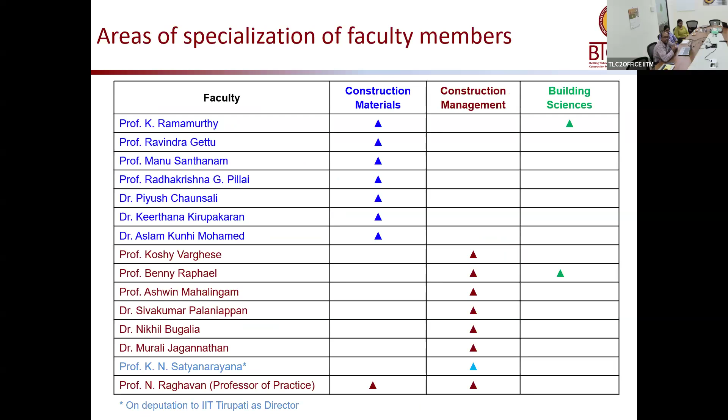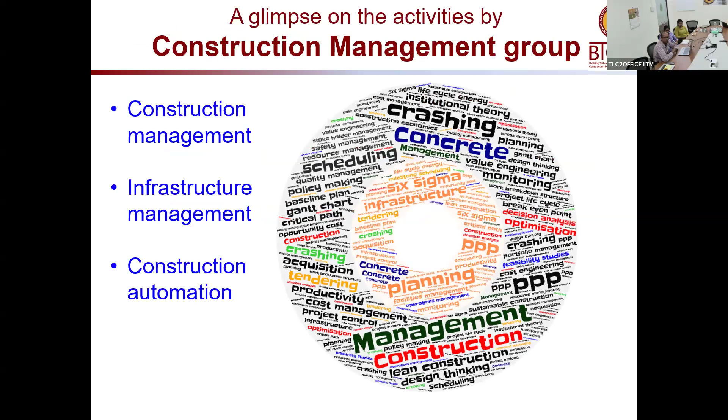Within the construction management group, of which I am a part, we focus on 3 important things: one is the regular construction management aspects, then the broader infrastructure management, and then we work on construction automation.

When it comes to studies on construction management, the typical questions we ask are related to some of the burning problems of the industry, like cost overruns, time overruns, and low productivity. These are traditional problems with respect to the construction industry, and there are solutions, but it's often not so easy to apply these solutions on field because it comes with its own problems in terms of application and implementation.

That's where we try to see how do we make lean construction, how do we implement lean construction into construction projects, wherein we try to identify the wastes not only in terms of material waste, but also in terms of process waste. We try to see what are those wastes that reduce our productivity at site, reduce them, and if possible even eliminate them. We work jointly with some of the leading construction companies in order to implement lean, and we have seen a good amount of improvement in productivity wherever we have been involved and lean construction has been implemented.

The next is a very crucial aspect: how do we embrace digitalization in the industry. We have a lot of discussions on building information modeling, and a lot of discussions on artificial intelligence that is coming up. But to what extent are these being taken to the industry, and to what extent is research progressing in these areas such that ultimately they are of help to us when it comes to actual implementation of projects?

Our faculty are working on solving some of the burning problems of the industry when it comes to application of BIM, artificial intelligence and digitalization, or even drones, and how they can help us solve some of these problems. Now, when it comes to project execution and project delivery, the whole framework is important to support the environment in the project and implement certain practices and take them forward.

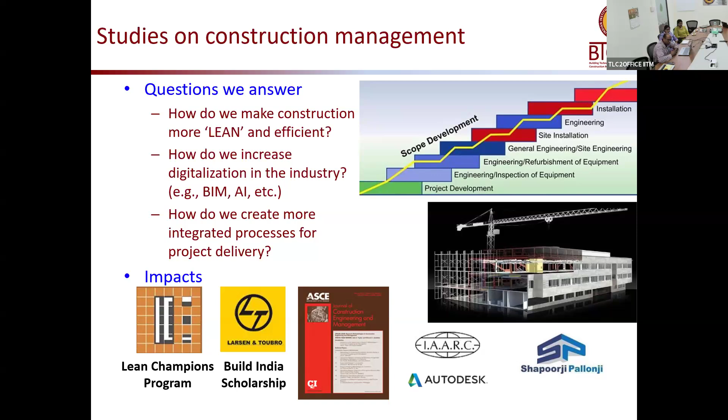Many of our research outputs have been published in some of the top-notch journals, and we have labs dedicated to building information modeling, through which we try to solve some real-life construction problems and take it straight to the industry.

Going ahead, in terms of studies on infrastructure management, mega projects are a norm these days. There's no project that's of a small value these days, and the scale at which we are talking about projects is phenomenal, and we are no less compared to what happens in other countries. So when it comes to management of mega projects, it comes with its own problems. It's not so easy. So what is required to get these mega projects to a successful conclusion?

That is something we work on, especially when the current trends are towards implementing sustainable practices, which is something we can no longer avoid. It is no longer a buzzword, it is something that's definitely required. We have centers here like Technologies for Low Carbon and Lean Construction, TLC2, wherein we all work together towards bringing in sustainable practices. The construction management group is also actively involved in getting these practices implemented into project sites.

When we have projects, it's also important to see whether we can get them delivered at a faster pace, at a lesser cost, and with improved quality. So what should we do for that? That is also something that we keep working on.

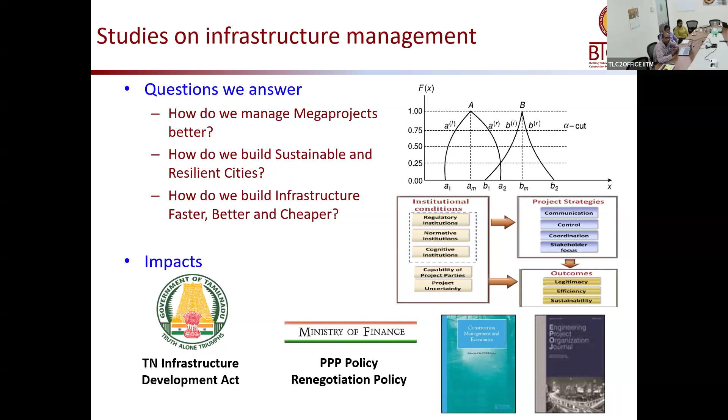We have active collaborations with the government of Tamil Nadu, and collaborations with the central government in bringing some of these practices. Some of our works have been published in some of the best journals, and we take up our presentations at some of the best conferences in the whole world.

When it comes to construction automation, which is fast catching up these days, we look at automation from the angle of improving time, cost, and quality of construction through automation and robotics. So we have students and faculty working on vision-based technologies, text-based technologies, a number of AI-based solutions, and bringing in automation combined with artificial intelligence to see if we can do something better than what we are doing, to improve productivity at the project sites.

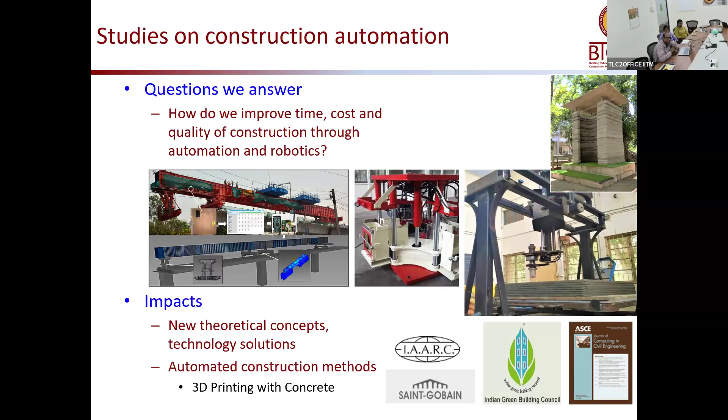We have an entire setup for 3D printing, and we have faculty fully dedicated to the workings of 3D printing. We also have students in our labs working on developing mix designs for 3D printing, and looking at some of the problems associated with 3D printing and how technology can be used to solve these problems.

In studies on sustainable construction, some of the pertinent questions we answer are: what about the relative contribution of construction energy with respect to building life cycle energy? How do we integrate sustainability metrics into construction planning and control practices? Because unless something is measured, we don't know whether we are improving or achieving what we wanted. So how do we integrate these metrics into planning and control practices, and how do we improve the schedule performance of construction projects in India with practical applications, to see if we can really make a difference in delivering projects better, faster, and with much improved quality?

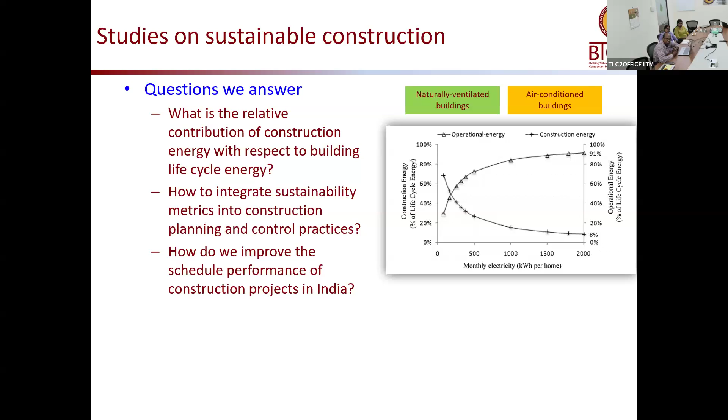Some of the recent works we do in our labs include digitized quantification. When it comes to concrete and construction and demolition waste, one of the biggest problems is how do I measure, how do I segregate, and how do I measure the quantum of waste? Because that is the beginning of everything else.

So our students along with our faculty members are working on ways in which you can have digitized quantification of C&D waste with minimal manual intervention, so that it can be faster and more efficient. You can also see the robotic arm doing segregation of different types of waste in the heap. That's very important for waste recycling industries, and segregation is actually a problem, but there are solutions, so we are working on them.

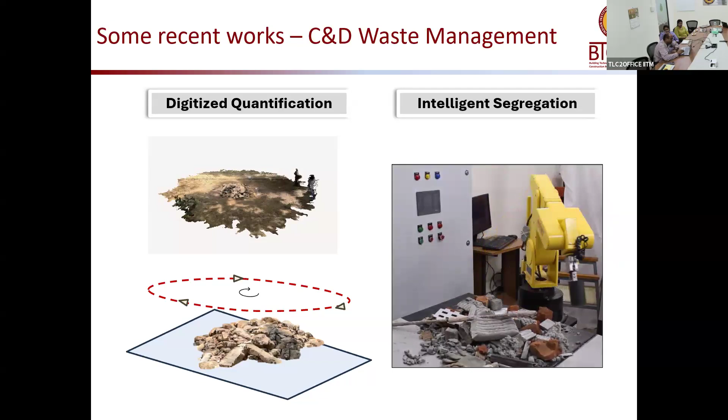So we have our own VR lab, where there is virtual reality training that some students and researchers undergo, looking at how we improve the quality of construction through VR-based training. You might have heard about safety-based VR training, but we are looking at quality-based VR training, and we have developed modules for that, which is really quite interesting.

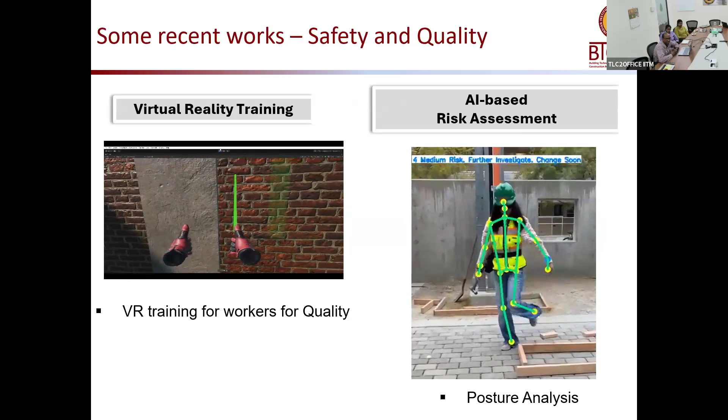And if you happen to come this side, we'll be very happy if you can walk down to our lab and we can show you what we are doing here. Interestingly, we are also working on AI-based risk assessment for safety assessment.

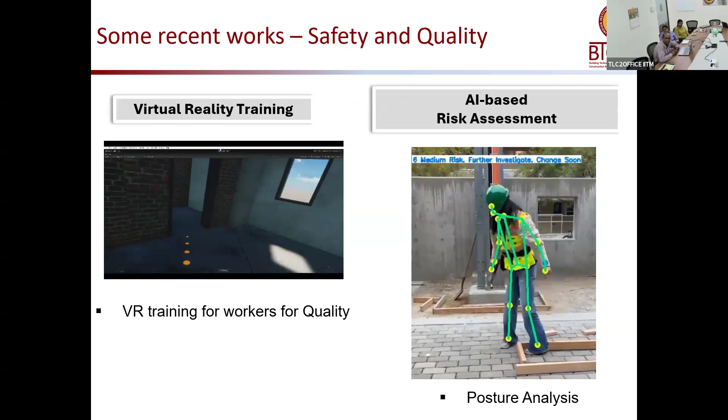You can look at the short video there on posture analysis to see if things are going on the way they should. These are some exciting things that we are working on, where we try to predict the failure of the 3D printing process with the help of vision-based techniques, for AI-based risk assessment.

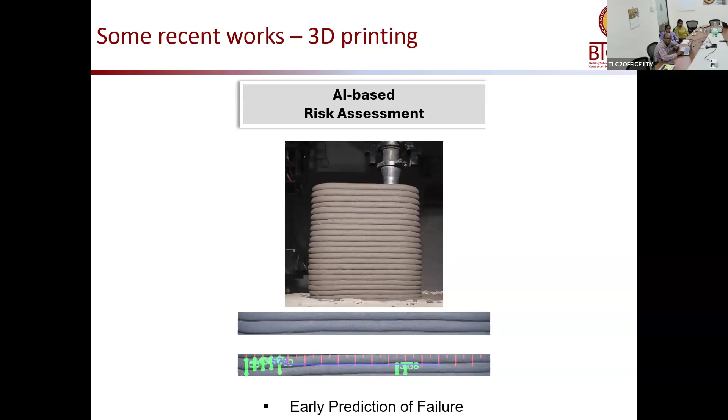We can predict based on how these layers are changing their shape. You can look at the video and see whether this particular mix is going to meet the requirements or not. This is something that one of the PhD students is working on, which is on early prediction of failure.

Now, I work on this area of construction, AI-based construction contract risk assessment, wherein I try to see if there is some kind of risk in the given document that we are going to sign as a contract document, and see if that can be assessed well in advance through natural language processing based techniques.

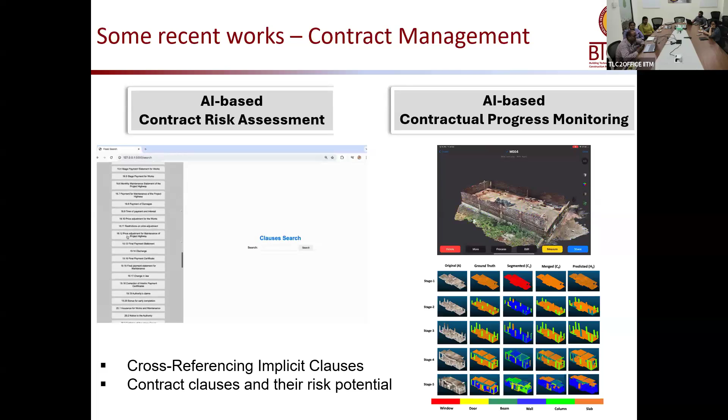We also have some of our faculty working on AI-based contractual progress monitoring, because this is one of the key areas in construction where monitoring the progress instantly is really important, since only then can we take corrective action. If progress monitoring and reporting has a lot of gap, that doesn't help in improving what I'm doing. So we can have monitoring systems which immediately compare with baseline schedules and come up with possible areas that might need immediate attention by stakeholders involved in the project.

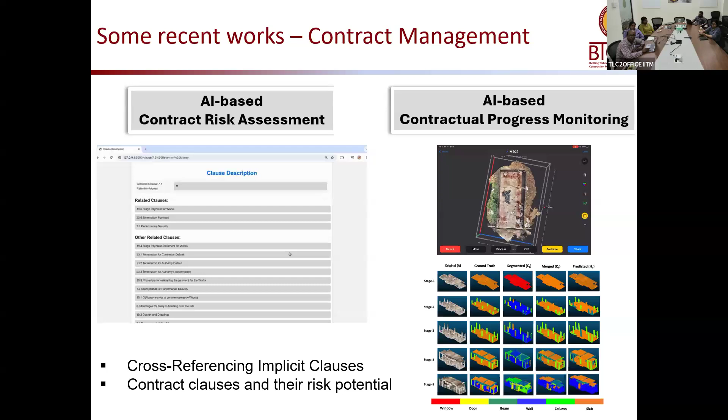So now I request my colleague Dr. Kirtana to take us through some of the research areas in construction materials.

Thank you, Hari. So hi everyone, I'm Kirtana here. I'm going to give you an overview of what we do as part of the materials, construction materials group. Some of the areas we are working on are cement chemistry and concrete microstructure, because we are involved.

The whole idea is to come up with a sustainable cement construction material. One key aspect is to work with cement, which we know has high carbon dioxide emission. So we try to work at the cement chemistry level and its microstructure and tailor it in such a way that it has low carbon output.

Then there are mechanical properties, dimensional stability, corrosion and durability. Corrosion is one of the pressing issues here, as we have a lot of existing structures corroding much before their design life. So how do we assess the corrosion and how do we design structures for long-term performance and durability? That's one of the areas.

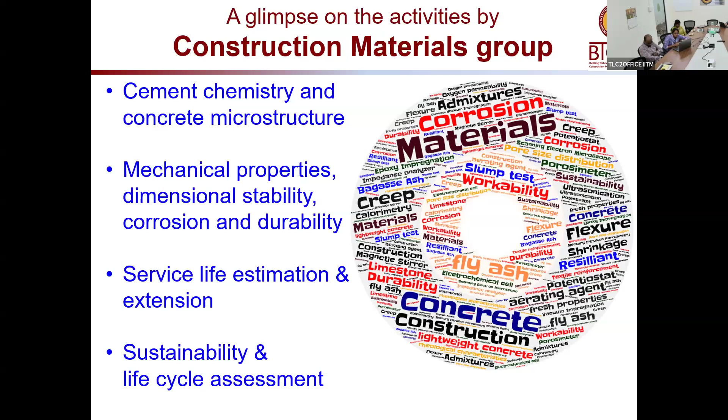Then there's service life estimation, which is how do we quantify a particular mix or material, and how do we estimate its service life and extend it? The other thing is sustainability and life cycle assessment. I'll go through these in more detail.

The main questions we're trying to answer are how to design special concrete for various specific needs. We are focusing on self-compacting concrete, fiber reinforced concrete, textile reinforced concrete, lightweight concrete, and so on. We look at how to tailor the mixes for these special concretes, how to assess their mechanical and durability performance, and how to utilize various byproducts and alternative materials.

We all know that alternative cementitious materials or supplementary cementitious materials are being used in cement, like fly ash, slag, limestone, and so on. So how do we effectively utilize it? What are the strategic procedures in which we have to go about using these materials?

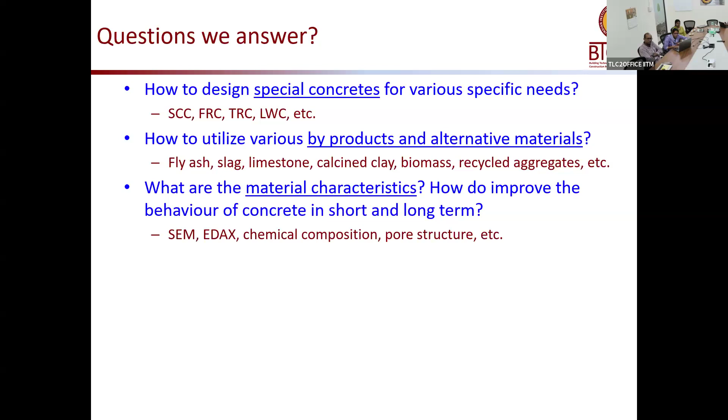Another thing is material characterization. When we are developing new materials, we have to understand its microstructure so that we can evaluate its short-term and long-term performance effectively. So we do SEM analysis, that is scanning electron microscope. We try to understand its chemical composition, the pore structure, and so on. We look at the micro scale.

We also look into estimating and enhancing corrosion resistance and the service life of our concrete structures. How do we arrest corrosion? In this study, we look at how to calculate chloride ingress, carbonation, corrosion rate, and how we protect the structures against corrosion using different protective methods.

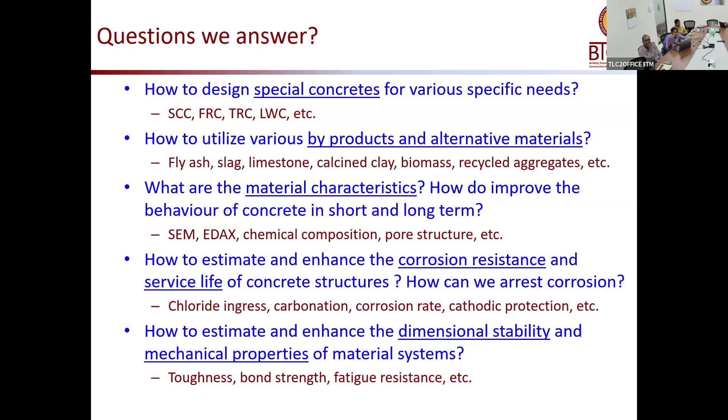The other thing is how do we estimate and enhance the dimensional stability and mechanical properties? We are developing so many tailored mixes and materials. After it hardens, we have to evaluate its mechanical performance so that we can use it in structural components. So there is importance in how we evaluate its toughness, bond strength, fatigue resistance, and so on. These are some of the broad questions we are trying to answer.

We have state of the art laboratory facilities in our department. This is the mechanical performance of civil engineering materials laboratory. We have servo hydraulic machines starting from 5 kilonewton to 1000 kilonewton. We do a lot of fatigue, fracture, and bond strength studies here.

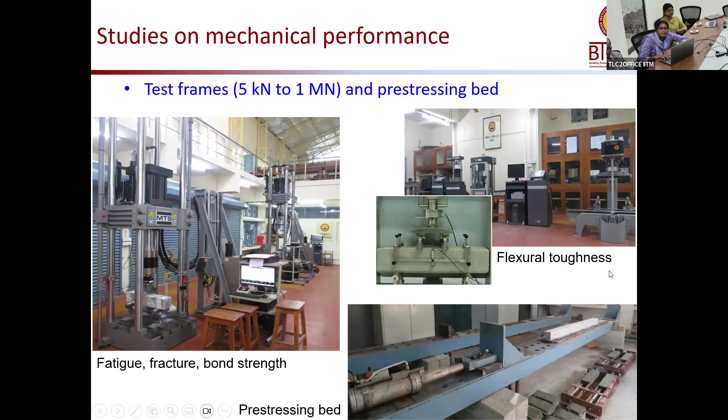We also do studies on pre-stressing beds where we do post-tension bars under stress conditions and under corrosion activities. So this is mainly for understanding the mechanical performance of the materials.

And then we have the lab for studying long-term durability performance. We can give the conditions of different temperature, carbonation, and set humidities at different levels, and we can see how the materials respond to these different environmental conditions and evaluate its performance.

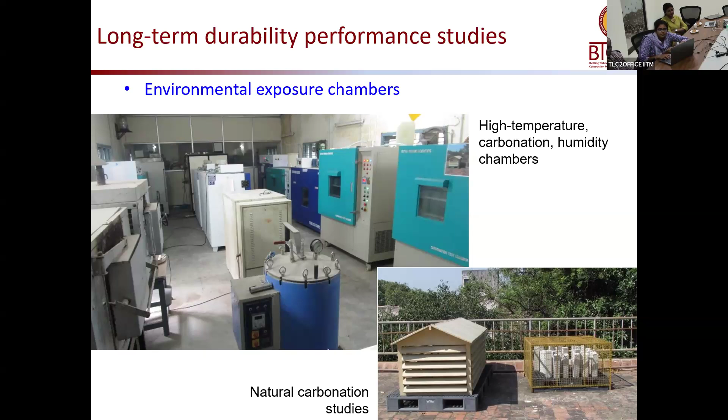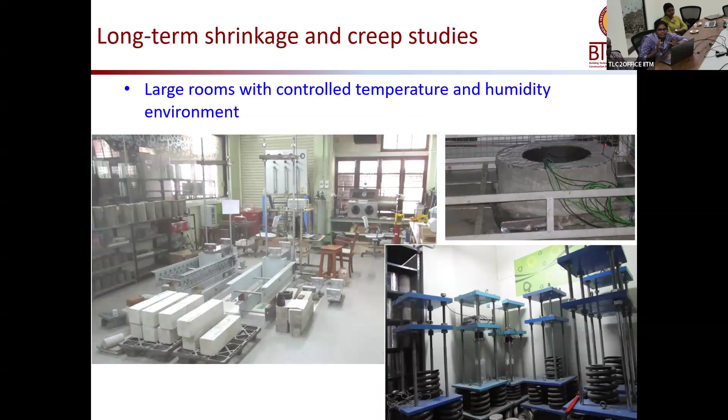And then we have long-term shrinkage and creep studies laboratory dedicated to that. We have specimens and experimental rigs designed to do these studies. Here also we maintain a particular temperature and humidity, and we have all these experimental rigs to do the creep and shrinkage studies.

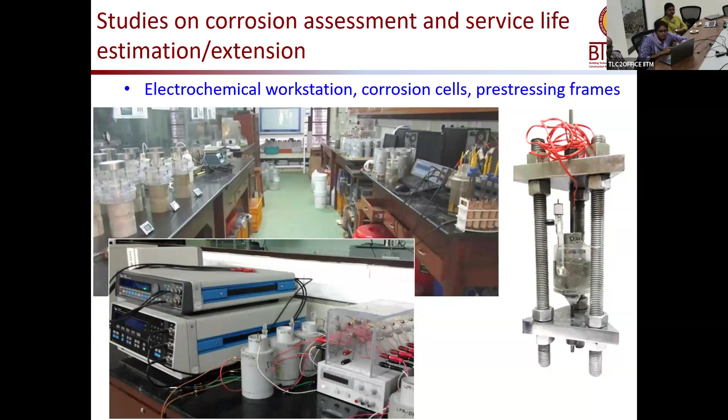In addition, we also do a lot of corrosion assessment studies. We have an electrochemical workstation, corrosion cells. Here we look at, from the small specimen, how these materials react under alkaline environment, how steel degrades, and all these corrosion related studies we do in the corrosion lab.

And then we also have a dedicated lab where we look into transport properties, like transport of water, carbon dioxide, and oxygen through the concrete, how it gets transported within the concrete. So we have concrete resistivity testing, and we have oxygen permeability test, and different test setups to study the transport properties through concrete.

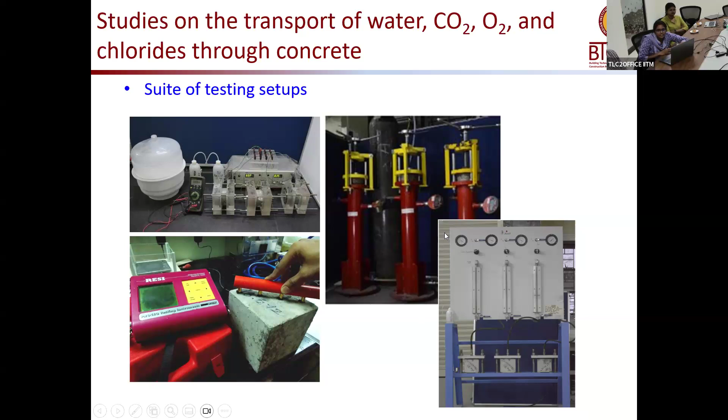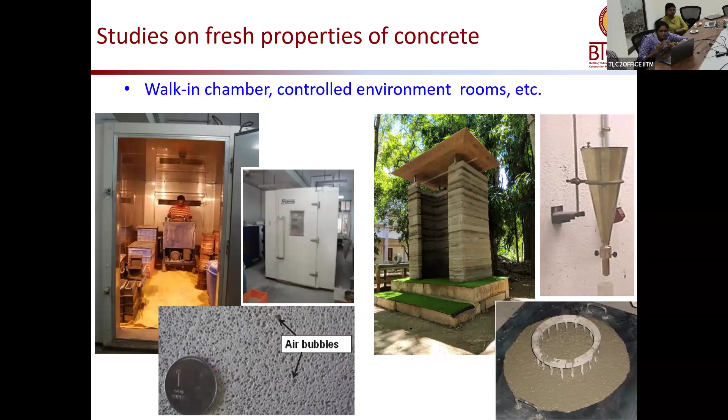And then the studies on fresh concrete. We have a walk-in environmental chamber where we can set up temperature for throughout India, whatever temperature variations we have, across the length and breadth of India. We can set the temperature in this chamber, take our specimens within it, and do the testing. And here of course, for fresh concrete properties, we have all the setups to do this analysis.

Like I mentioned before, we have to understand the microstructural properties. So we have all the state-of-the-art facilities to do the microstructural studies of cementitious systems.

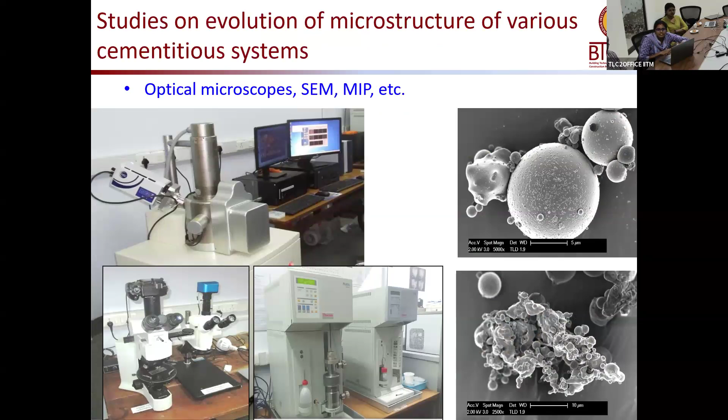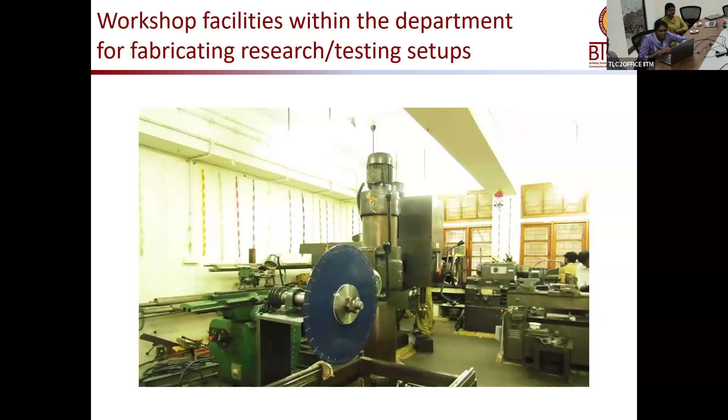In addition, we also have an in-house workshop within our department. So whatever experimental rigs we want to fabricate, we have a workshop here. We just have to go there, give the dimensions, and get the setups ready. This is a real advantage for us who are doing a lot of work in experimental mechanics.

In addition, some recent work we have done is using alternative raw materials like low-grade limestone, biomass, overburden clay, and we looked at low-carbon cements. We also have a mini cement plant within the institute, and we do a lot of molecular modeling because we are trying to tailor our mixes. We try to see at the molecular level what's happening, and we have faculty working on molecular modeling.

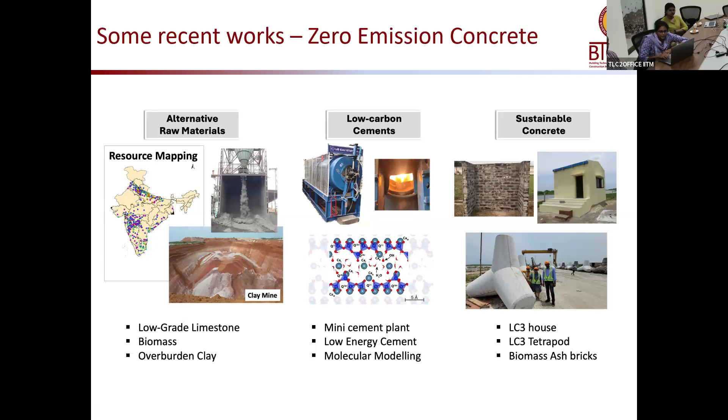And then we have, of course, sustainable concrete. We look at LC3, that is limestone calcined clay. We have looked at these houses made up of LC3 tetrapods, and these are all actually currently in service right now.

Professor Radhakrishna Pillai got an IIT patent for tendon fill grouting, which is for resistance of corrosion of pre-stressed strands.

We also use textile reinforced concrete, which since it doesn't have steel reinforcement, we used as sewage water tanks, and we have successfully installed it in our hostels, where it's currently in service.

Other than that, we have been involved in metro rail projects where tunnel segments subjected to tunnel boring machine jack forces are tested, and we are looking into fiber reinforced concrete tunnel linings, its testing and its design methodology.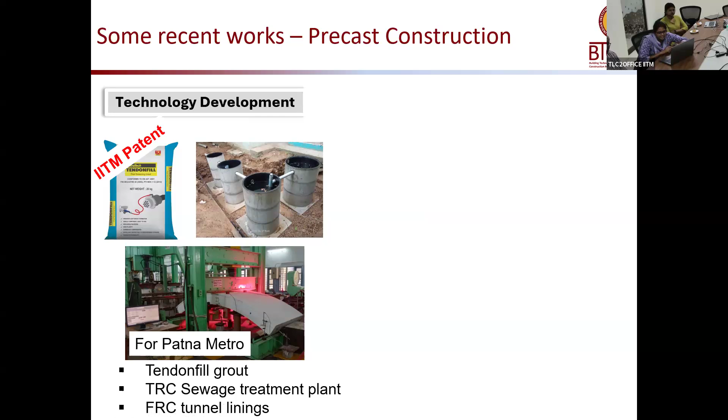Recently we built a sports complex within our campus where we used PPVC, prefabricated pre-finished volumetric construction. That technology is also being used for our hostel. So we are using all the latest technologies within our campus, and it's a great place to understand these technologies.

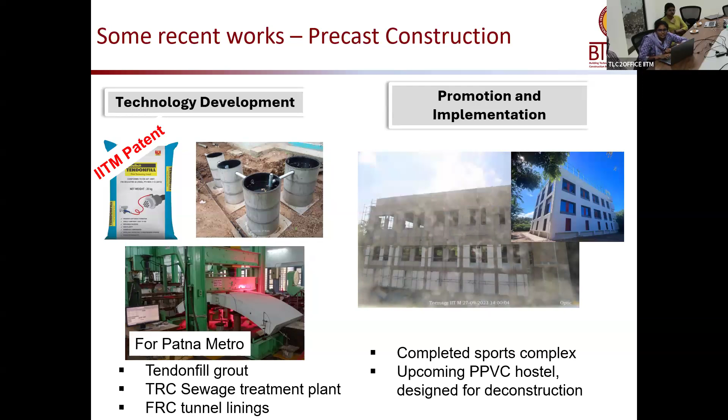Coming to life cycle assessment, we are talking about different materials. We have to understand what is the energy output, energy dissipated, starting from the production stage, manufacturing stage, during the construction phase, and during the service life of the building, and finally at the end of the service when you're demolishing the building.

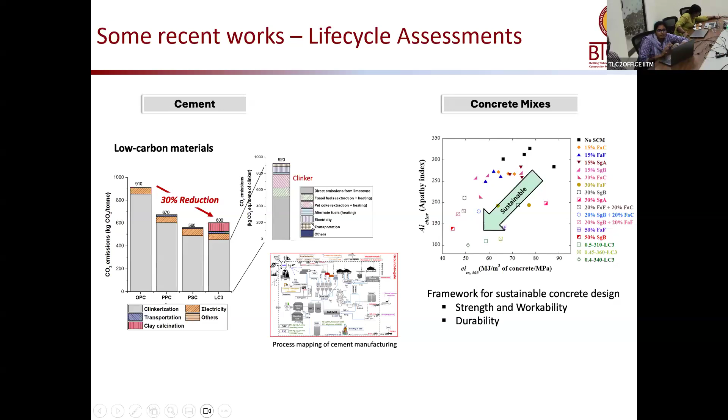So throughout this life cycle, how much energy is there, how much water you are using throughout the process, what is the transportation energy due to transportation. All this energy has to be compiled to have a good assessment of whether the whole process is sustainable or not. So for that, we do life cycle assessment to get a full understanding of the sustainable potential of a particular technology.

So now coming to the openings in construction management, construction materials, I'm giving it over to my colleague Murli. He will tell you about the topics.

When it comes to construction contracts, I'm specifically looking for people to collaborate with me on how to assess opportunistic behavior and construction disputes, how to measure them and how to mitigate them, because that's a big problem in the construction industry when it comes to claims and disputes management.

Also looking for people to work on a framework for implementing lean and sustainable construction practices in projects.

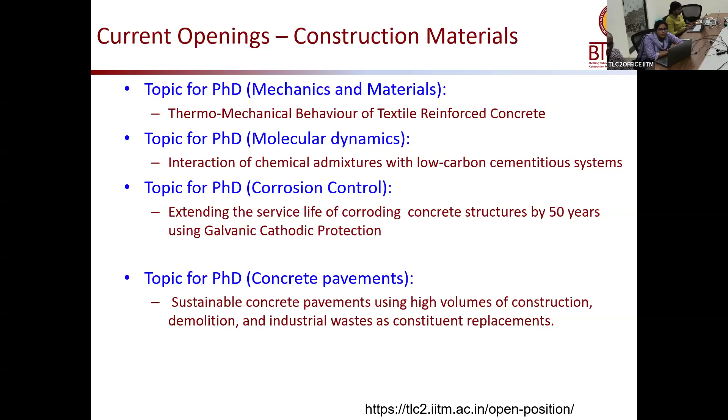If you want to know more about the eligibility criteria, please go to research.iitm.ac.in - it will give you all the details you require. We also have our website - the civil website, BTCM website, and TLC2 website. TLC2 refers to Technologies for Low Carbon and Lean Construction. We've updated all the details on these two websites, and all the faculty profiles and their areas of work are elaborated there too, so feel free to check what we're working on.